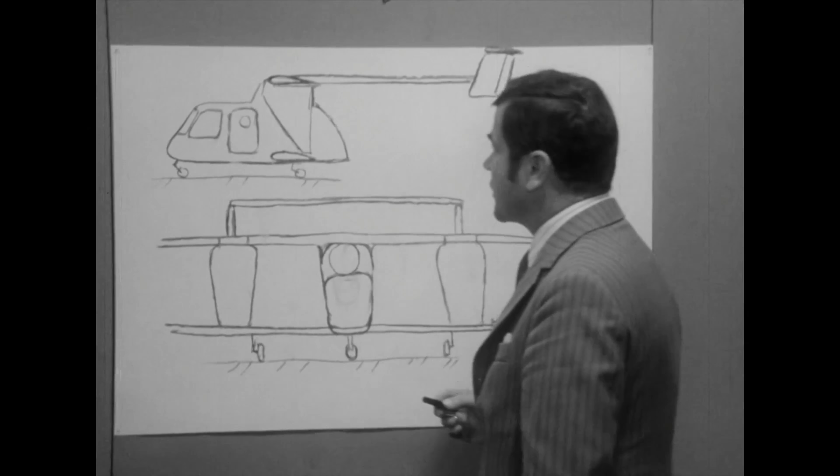Okay, so which country was really behind this jaunty aircraft? Absolutely no prizes for guessing. Well, obviously it was the Soviet Union. 200 engineers were involved in the creation of this aircraft. And with the terrible leadership of two communist countries, we truly have an aircraft designed by committee.

Okay, so I figure I get to do one Soviet anthem drop per subscriber milestone.

Anyway, this story starts, and to be honest kind of ends, with the AN-2. It's difficult to deny that the AN-2 is one of the greatest aircraft of all time. It can be used to transport cargo or passengers, both military and civilian. Variants have been built for water bombing, as seaplanes, for airborne research and ambulances. It can land virtually anywhere. It's easy to fly and has excellent pilot visibility.

And these factors made it uniquely suitable for a different application, crop dusting. A 2-ton hopper can be installed in the fuselage to spray crops with chemicals, and the Soviet Union had plenty of crops to spray. Though large for a crop duster, the comparatively high payload capacity and stability of the AN-2 made it ideal for extended work spraying the expansive farms of Russia.

And interestingly, the majority of them were built in Poland by the state-owned manufacturer WSK Mielec, subsequently PZL Mielec, the heroes of today's video.

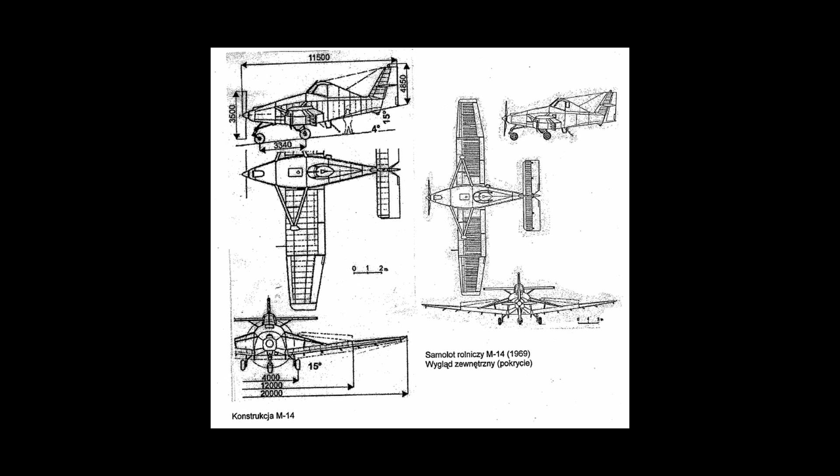The Poles agreed. Mielec had tentatively begun an attempt to rejuvenate the country's aviation industry by commencing work on the M-14. This would replace the crop dusting duties of the AN2. It was to be a huge aircraft for its class with a 20-metre wingspan and powered by a 1,250 horsepower turboprop engine. Those wings would require bracing, and we'll talk more about that later.

But crucially, on paper, there's no reason to assume this wouldn't be a great aircraft for the role. It looks like a crop duster, just a really big one. We're going to gradually find out why crop dusters look that way. But now it's time for the Soviet Union to enter the picture.

And thanks to them, the world was eventually graced with a jet-powered fixed undercarriage biplane crop duster. Now, it would be easy for me to spend the next 40 minutes mocking this, but I'm not going to do that. Well, I'm not going to do that exclusively.

You see, I think there was some method to this madness. Let's not kid ourselves, the M-15 was an absolutely ridiculous aircraft that was ill-suited for, well, anything really. But with some changes, I think there could have been a good aircraft in there somewhere. So let's examine all the major wacky design choices, find out why they ended up in the design requirements, and figure out what on earth the Soviets were thinking.

I think it's best to start with what must have been the worst design choice of all: a jet engine in a crop duster.

There are many reasons this only happened once, and we'll go through those reasons in this chapter. The engine chosen was the AI-25 medium bypass turbofan, prominently used on the Yak-40. By all accounts, a perfectly respectable engine. A derivative of it was even used recently and prominently on the Turkish Bayraktar drones. You'll note a Bayraktar and a Yak-40 are less aerodynamically challenged than an M-15.

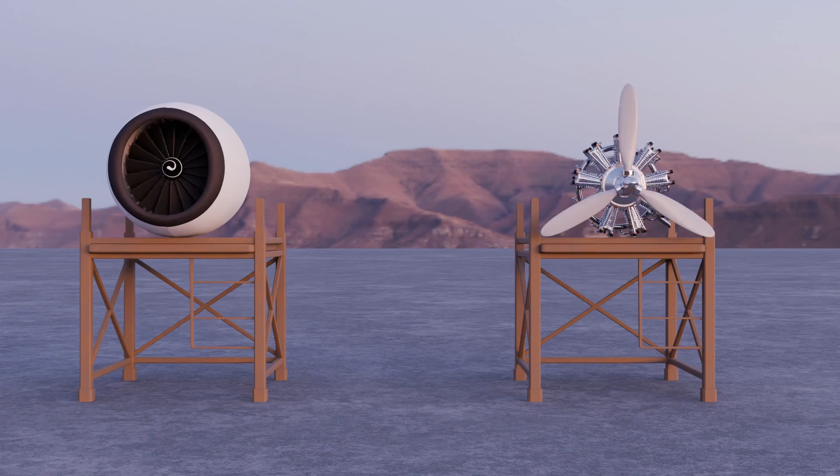So let's talk about fuel efficiency. You've probably heard before, jet engines, specifically turbofans, are extremely efficient, but there are different types of efficiency. Where a typical internal combustion engine will convert something around 25% of the chemical energy in the fuel to motion, a turbofan manages closer to 65%.

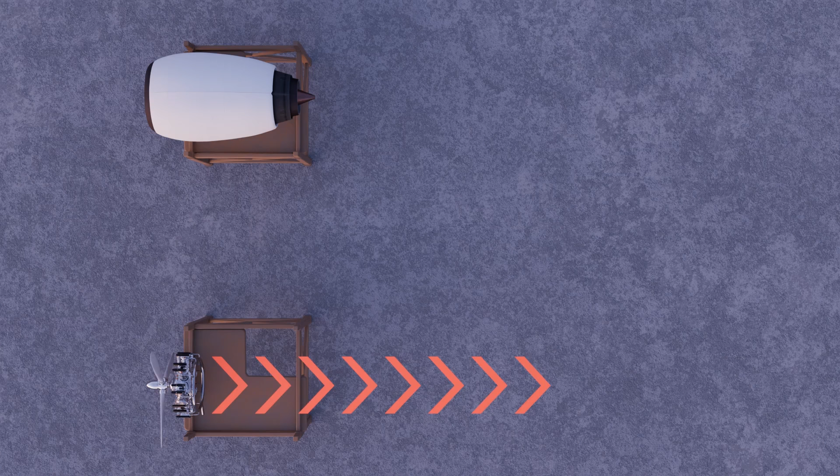Now, a propeller cannot accelerate incoming air to as high a speed as a jet engine can. So for two broadly equivalent engines, the jet is more efficient at accelerating air. But see what I did there? I'm talking about engines just sat on the ground and not moving. All of that newly converted kinetic energy is in the air, which flows at high speed out of the engine exhaust.

So I was talking about the efficiency of just the engine itself. We really only care about how much kinetic energy goes into the vehicle itself. This is what I'm talking about when I refer to fuel efficiency. How much chemical energy in the fuel is eventually converted into kinetic energy of the aircraft. This is also referred to as the propulsive efficiency of the aircraft.

Now, if you try Googling why propellers are more efficient at low speed, you'll get a ton of overly detailed descriptions of bypass air, high combustion temperatures, propeller tip speed limitations, and much more info we do not need. Here's how I've always thought of it: we don't care how the engines work, we just know that a jet accelerates air to a higher speed than a propeller.

So let's put a propeller aircraft on the runway, turn on the brakes, and spin up the engine to full power. All the energy is currently going into that backward airflow and none into the vehicle. The propulsive efficiency is 0. Okay, now let's just take off and get up to cruise speed.

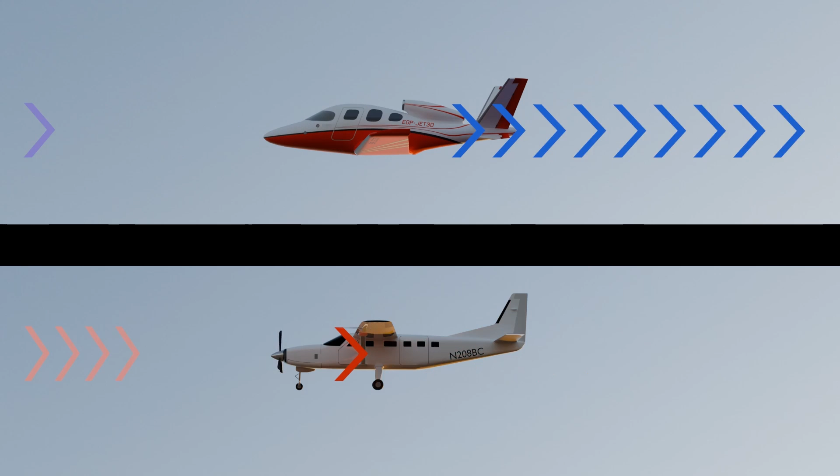Minimizing that air resistance is crucial to ensuring our fuel is used to accelerate the aircraft, not the air. With all that in mind, let's do something ridiculous. Of course, no one would actually build an aircraft like this, but we'll increase the drag as much as possible by making a huge frontal area.

I don't know, let's just replicate the fuselage a couple of times. And let's be really funny by adding a second wing with a huge twin tail. And while we're at it, we'll make the landing gear non-retractable.

Now let's fly this extremely silly aircraft as low to the ground as physically possible, where the air is at its most dense. Our jet engine is only going to be able to get the aircraft up to a relatively slow speed before it can't overcome the air drag.

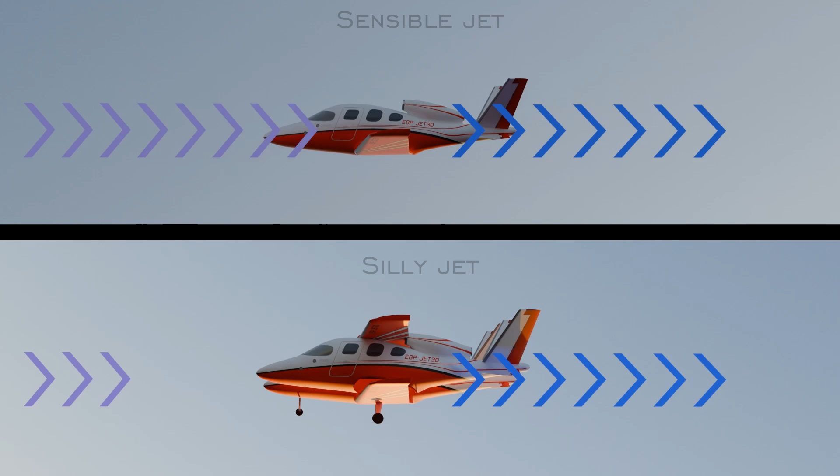The problem is, that exhaust is still moving at the same speed relative to the aircraft that it was before. The end result is us accelerating a lot of air backwards at a high speed, whilst accelerating not very much aircraft forward at a low speed. Most of our fuel is being used to accelerate air, not aircraft.

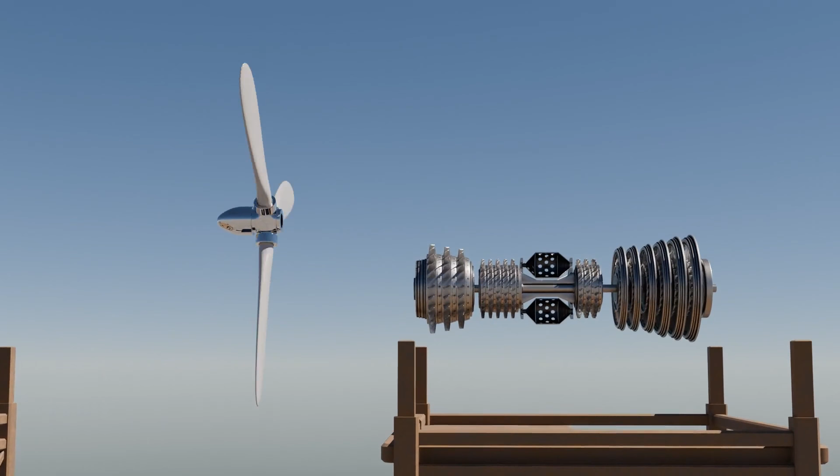Now, maybe we could combine the high combustion efficiency of a gas turbine with the propulsive efficiency of a propeller at low speed by connecting the two via a gearbox. Oh, right, yeah, that's just a turboprop. I wonder how many times I'm going to say they should have just used a turboprop in this video.

The AN2 was not considered particularly fuel efficient at the time. It consumed about 200 litres of fuel per hour. For the M-15, it was 550 litres per hour. Hilarious, considering the AN2 had a higher cruising speed.

Now, there is a theory that because jet fuel was, quote, cheaper than gasoline in the Soviet Union, end quote, that made sense economically. I absolutely do not buy this at all. Jet fuel is certainly cheaper than the more refined avgas used in piston aircraft today, but I think it being less than 35% of the price would be pushing it. And, you know, turboprops ran on jet fuel.

Just use a turboprop. There are a couple of other weak arguments for using a jet engine, and I don't buy those either. One would be the leniency of jet engines when it comes to fuel. That is why jet fuel is less refined than avgas.

The gas turbines on the oil platforms I used to work on could be fueled with practically anything. In an emergency, they could even run on unrefined crude oil, but that was very much not recommended and would require a full strip down if it was actually ever performed. I'm going to go out on a limb here and assume that running an aircraft engine on incorrectly refined fuel is very much frowned upon. So no, I don't think it was intended for Ivan to run his M-15 on vodka from the potato farm.

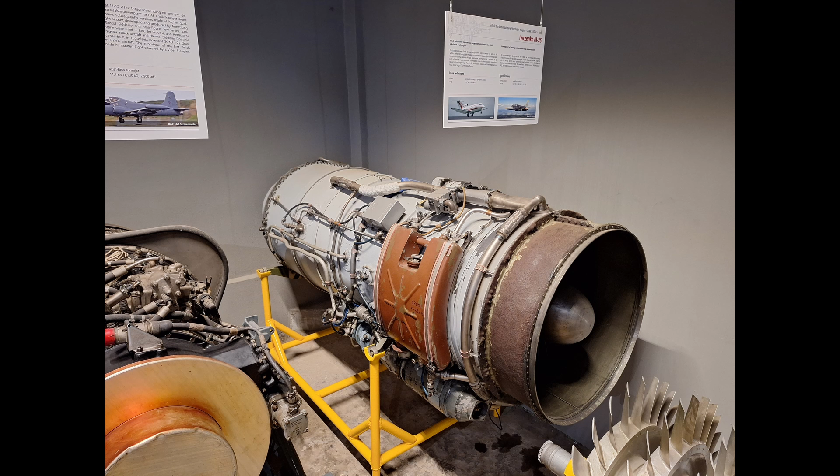Oh, and jet engines are really noisy. That's how the M-15 got its nickname, Belphegor. Though that story is actually quite cool. When exhibited at the Paris Air Show, a journalist used the term in a derogatory manner. Mielec went with it and adopted Belphegor as the unofficial nickname.

You'd think finding another suitable turboprop would be relatively simple. But no, it seems some weird politics happened, and when 1971 rolled around, that was the point the Soviets decided to partner with the Poles. And part of the agreement was the development and production of, quote, new aviation technologies in Poland, end quote.

I've heard it banded around that the Soviets wanted to showcase their tech to the world. Maybe this was part of the reason they insisted on using a jet engine, technology which had already been widespread for 25 years at that point. But either way, I'm pretty sure the actual reason for the choice was just the usual combination of terrible decision-making, corruption, and coercion by higher-ups in two dictatorships.

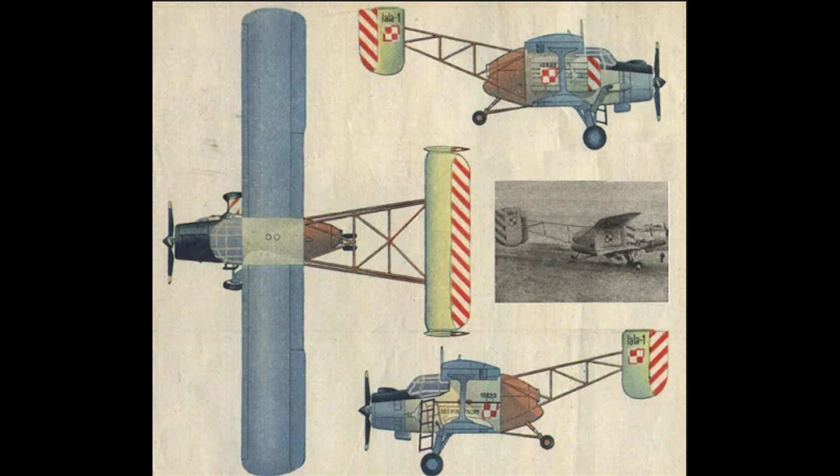There are a few interesting key details. First, the La-La-1 went from initial concept to first flight in just 8 months, and 2 months later, the first flight under jet power was carried out. NASA referred to this as, quote, 'an engineering and organisational success', end quote, and I am certainly not disagreeing with them there.

The AI-25 jet engine requires a smaller starter engine to spin up. Normally this would be part of the ground support equipment. So how was the La-La-1's jet engine started up mid-flight? It technically had 3 engines, because the starter was also mounted internally. When the time came, a dedicated fuel supply was used to turn on the starter engine, which spun up the jet engine, allowing for the forward radial engine to be cut off.

Pilot safety was surprisingly well accounted for, for something so disjointed looking. All 3 engines were isolated in independent fireproof compartments and had their own fire suppression systems. Egress hatches were fitted in the upper canopy in addition to the new doors, which were necessary since pilots could no longer enter from the rear. That's the reason for this ladder as well. In fact, seatbelts were even fitted.

Yeah, I can't decide whether NASA were being sarcastic mentioning that, but they state that the base AN-2 didn't even have seatbelts for the pilot. That can't be true, can it?

So, what did Mielec learn from the La-La-1? Well, it was fitted with a chemical hopper and dispersion system, and they learnt that jet exhaust doesn't really interfere with the chemical dispersal. It would interfere even less if it was mounted high up. This may be the only tangible benefit of using a jet engine in a crop duster, though every other crop duster on Earth that does not have a jet engine seems to manage this just fine.

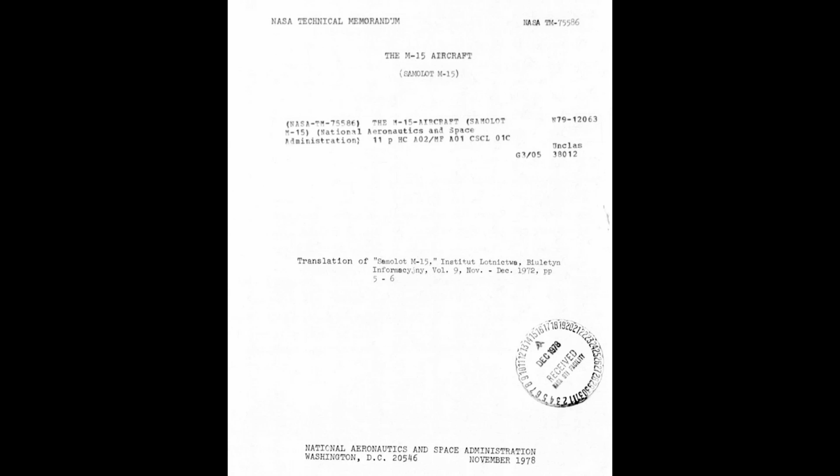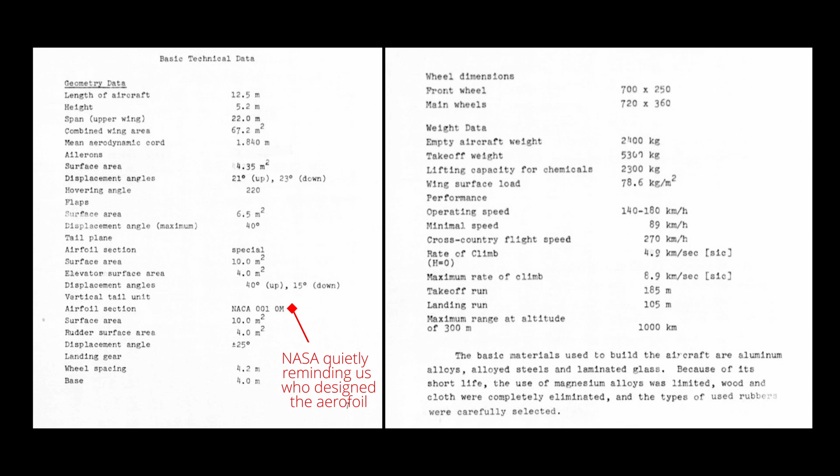Let's see what an engineer working for Mielec at the time had to say about it in this translated paper. Quote, "Using a sesquiplane system permitted rational division of the upper and lower wing." End quote. Indeed, most of the lift came from the upper wing, which was also fitted with the ailerons, flaps and slats, the latter of which were designed to decrease takeoff distance.

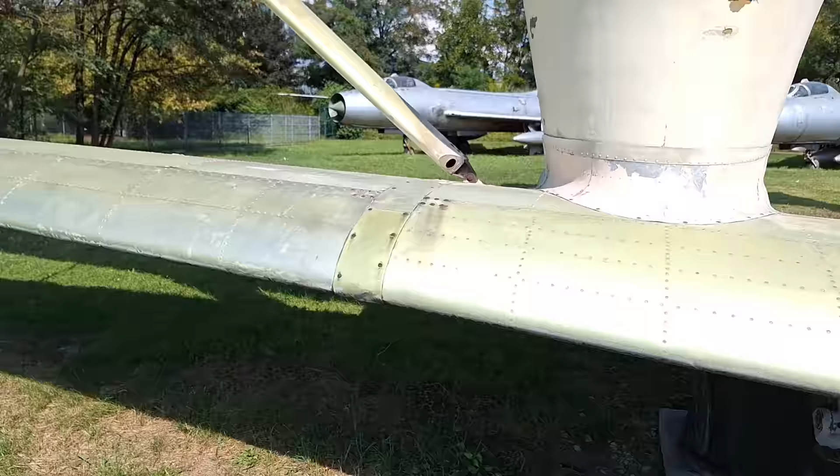The lower wing had integrated pneumatic pipes to deliver compressed air and to distribute the chemicals to the nozzles placed along the trailing edge. So we could say the upper wing was for lift, the lower wing was for crop dusting in a sense.

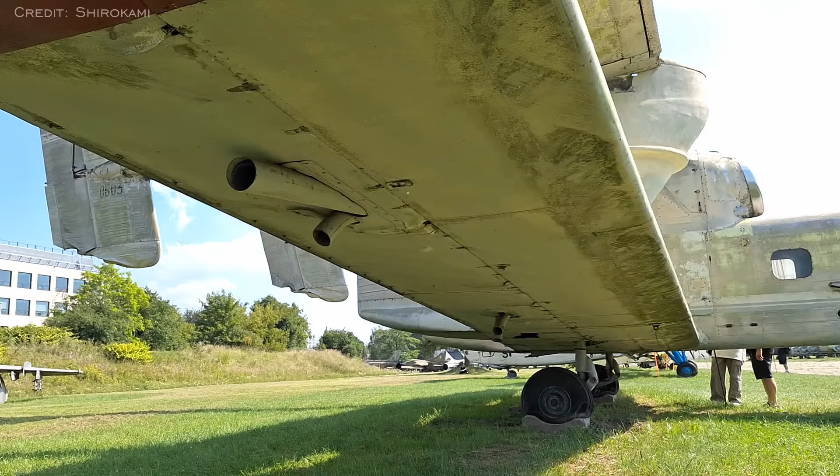One interesting point of note, some articles describe the lower wing as being made of laminate. I can't find any evidence for this from original sources. The paper above states that the primary materials for the M-15 were aluminum, steel and glass. Wood is one of the materials that was completely ruled out. So, if the lower wing was made of a laminate, it wasn't a wood laminate. All that said, the paper does describe the ailerons as laminated, whatever that means. The entire airframe was, however, covered with an enamelled epoxy to protect it from chemical corrosion.

Alright, so I've discussed the positives of going with a biplane for a crop duster. The problem is, another design choice essentially removed the main advantage of a biplane. In fact, I'm honestly not even sure it can be called a biplane anymore based on what I'm about to discuss. So, why were most early aircraft biplanes anyway?

See if you can guess what flavour of engineering my degree is based on how I explain this. Okay, let's take something like that braced high-wing monoplane from earlier. I'm going to do some unspeakable things to it, so, well, brace yourself.

Removing the bracing would put an awful lot of bending load on the wing roots here. Even with the bracing, the bending load is significant. During the early 20th century, the materials were just not there to resist a bending load like that. That is because the materials of choice were basically wood spars and string.

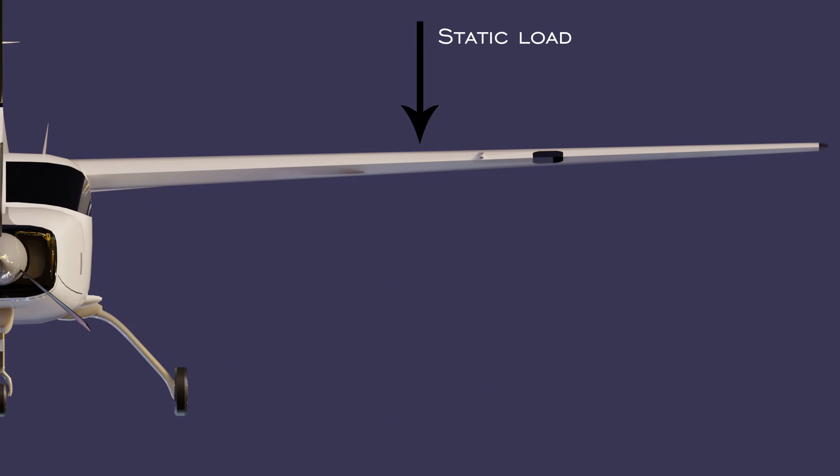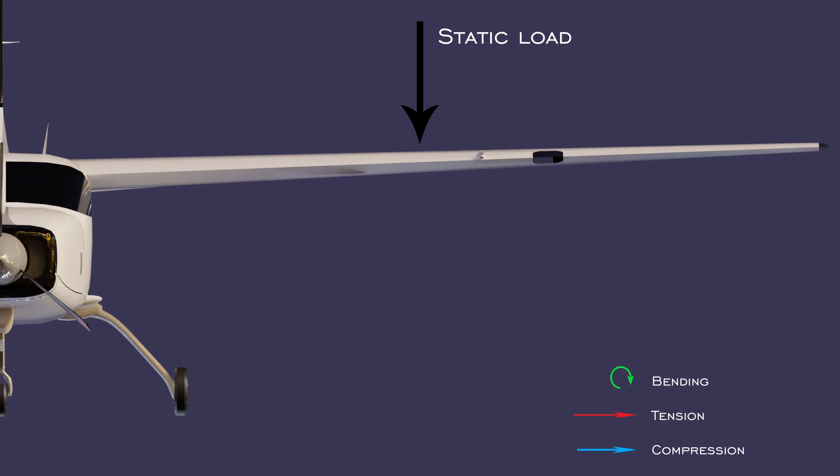When the M-15 was designed, the equivalent materials were aluminum spars and steel cables. Both are excellent in tension, and the spars can also act quite well under compression. So we want to get as much of our wing into tension as possible, followed by compression, and we want to minimise bending loads. Well, here's a way to do it.

Just replace the wing with an I-beam. The horizontal members can both be aerofoils. Now, there may be some problems with that.

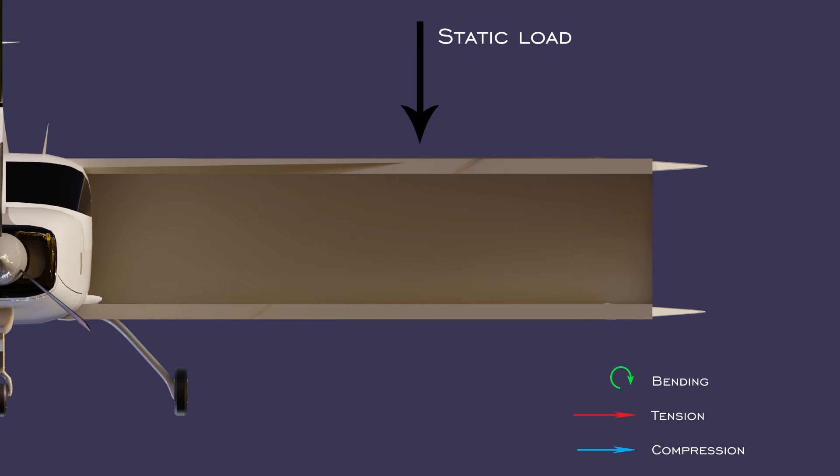Okay, let's cut out some of the I-beam to make it lighter. That intuitively looks like it'll still hold, so let's cut out some more. In fact, let's replace the diagonals with cables, join everything with pin joints, and we've made a cable truss. And yes, my degree is in civil engineering.

I think the only other thing I could have done at this point, more stereotypical, would be to make the thing out of concrete. Honestly, based on what we've discussed so far, I'm surprised the Soviets didn't try that too.

Anyway, here's why this truss works in 2 dimensions only, just to keep things simple.

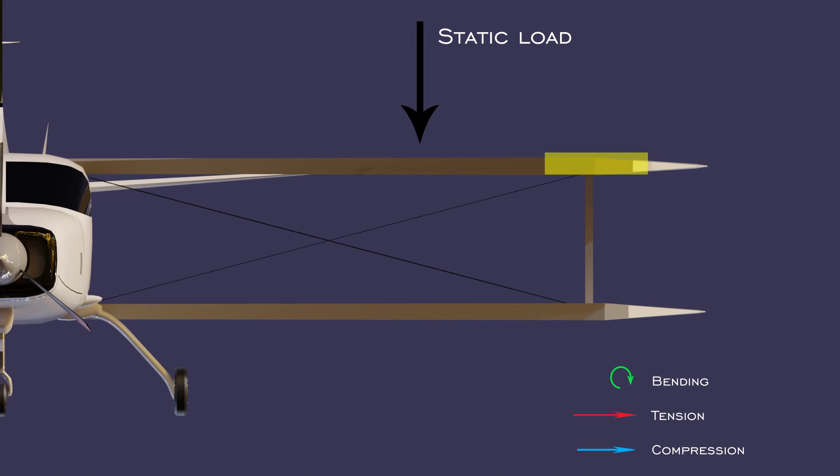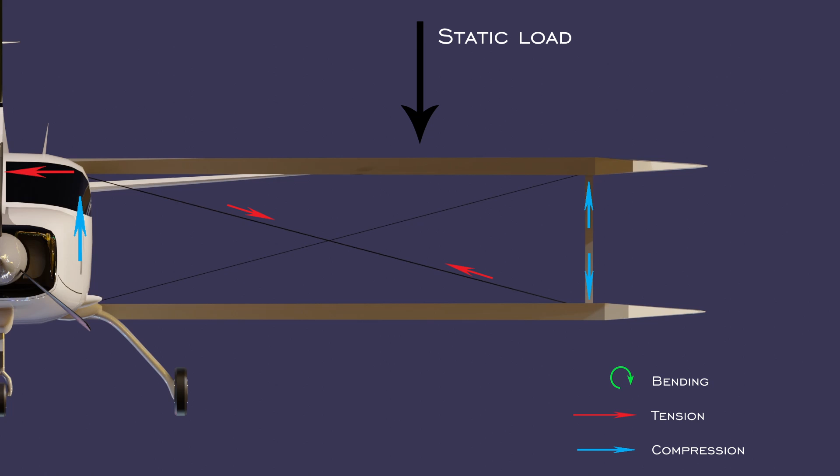Consider this point near the tip of the wing. As the wing tries to flex downwards, it pushes this spar downwards, but this diagonal cable stops the spar from moving by going into tension. That tensile force is transferred into the fuselage as a compressive load in this direction and possibly a tensile load in this direction. Likewise, a lift force on the lower wing puts this member into tension, transferring the load into the fuselage.

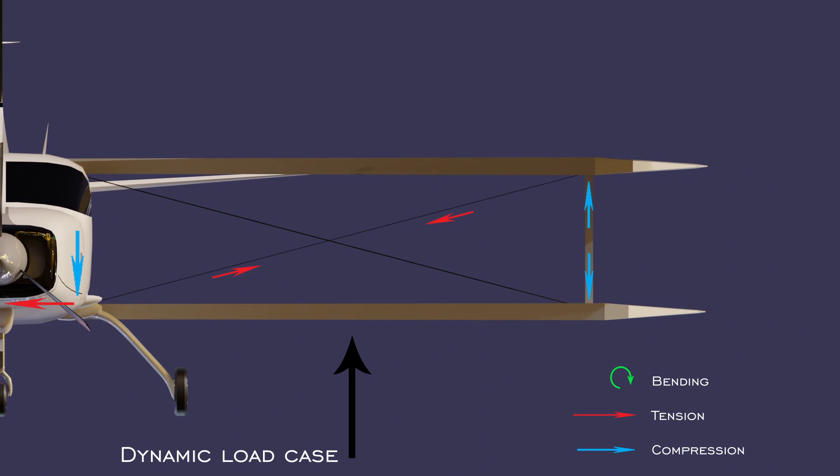So a biplane doesn't require materials with high bending resistance. It has a shorter wingspan than an equivalent monoplane, but the second aerofoil adds additional lift.

Now let's try to decipher what the heck is going on here. Putting the chemical tanks on the wings was certainly a decision that was made, and it completely ruins our biplane model. It ruins a few other aspects too, but we'll get there.

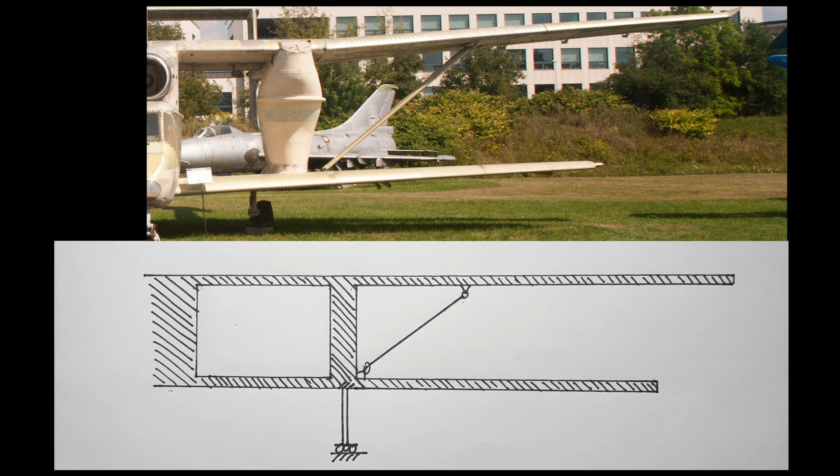Alright, so here's me trying to figure out the load paths. I actually had to rewrite this section twice until I figured out what was happening. I think I was overcomplicating things, and it's probably simpler than I initially assumed. But the crucial detail, I'm pretty sure these tanks were welded to the wings, making the connections fixed. So we can think of this entire box as an extension of the fuselage. It's relatively rigid and contains enough material to resist tensile and compressive loads from the wings.

Okay, let's add in the upper wing. This member is a brace for the upper wing. So far, we can consider this setup as a braced high-wing monoplane. There's still a pretty significant cantilever here, so this portion of the wing over the bracing would have to be built to withstand the associated bending load. The bracing itself carries much of the wing's weight as compression and passes it into the fuselage.

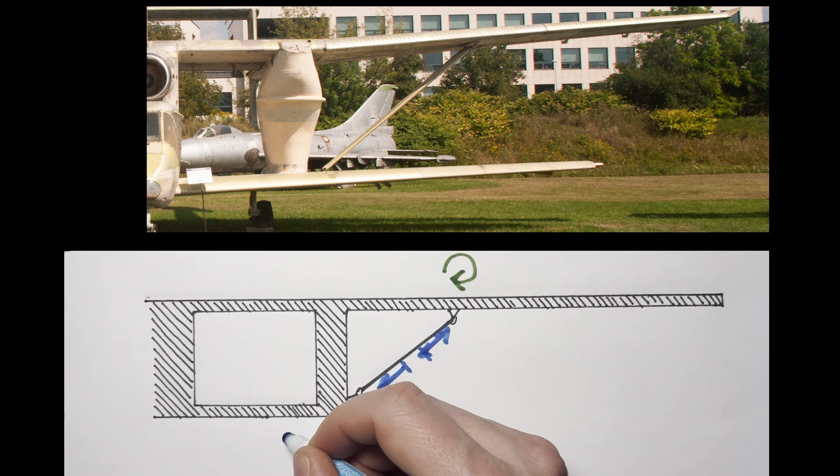Now let's add the lower wing. Outboard of the chemical tank, it's independent of the upper wing, so this length is supported entirely by bending resistance here. As the wings are structurally independent, the main structural advantages of a biplane are lost, as there are no cables and wingtip compression spars to effectively convert the bending loads into axial loads.

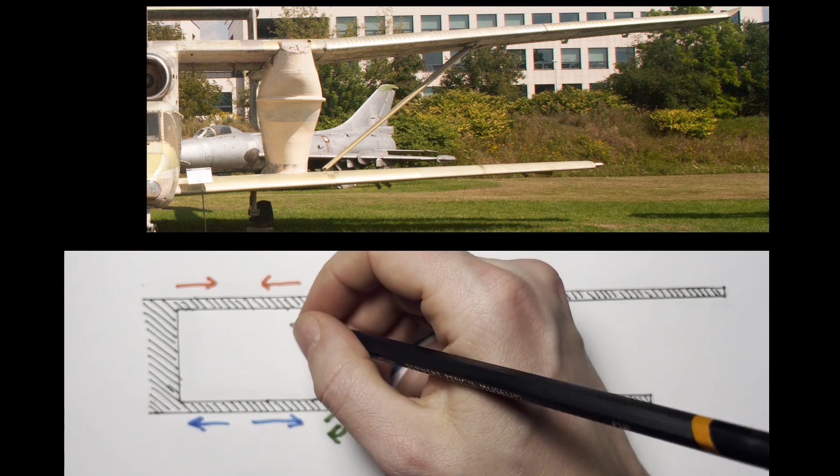Now finally, we need to consider the maximum of 1.5 tons of payload in each chemical tank. This sits above the landing gear, and I'll give credit here, that's kinda clever if we consider it in isolation. When on the ground, the landing gear takes the load in compression, preventing it being applied as bending to the wing roots. In flight, I'm less sure. For calm conditions, the lift would counter the weight of the tanks. But in turbulence, that heavy load on a moment arm from the fuselage may be trickier to model.

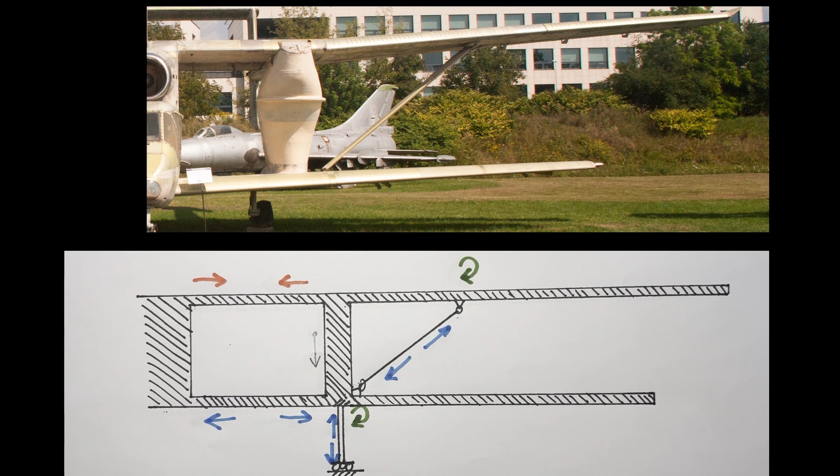The whole thing is a strange hybrid between a braced upper wing and a biplane. I'd summarise it as a widened fuselage braced upper wing with an unbraced lower wing. But it's not quite a torsion box biplane either.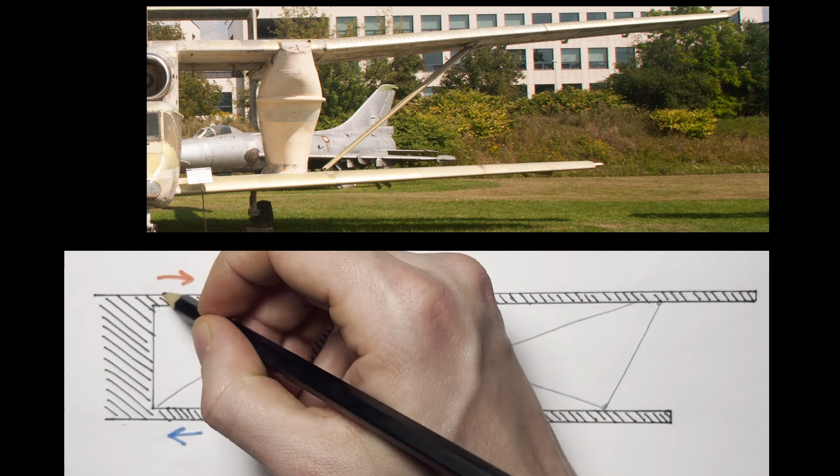So why didn't they do this? I don't really understand. And don't give me extra drag as the answer. This thing already has as much drag as a sail, and the payoff for adding some spars and cables will be less structure in the wing roots, and the wings themselves actually, resulting in a lower angle of attack, offsetting that extra drag. Yeah, it looks ancient, but the Soviets made the biplane bed, so they should have slept in it.

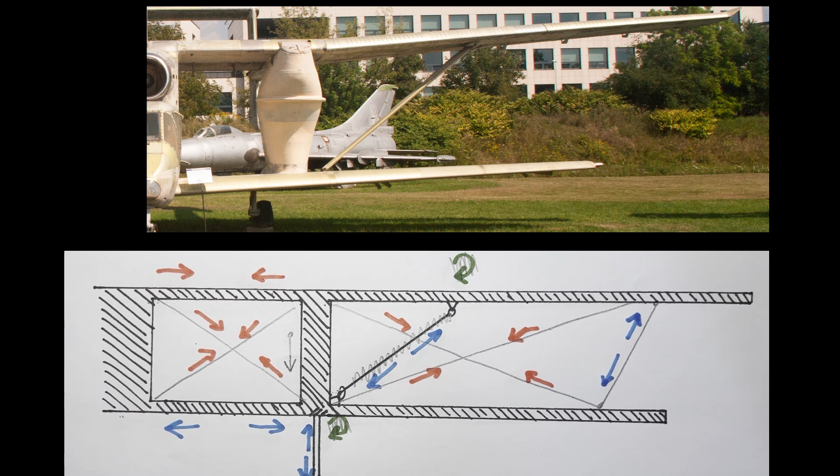Now, I will say, just because I don't fully understand the approach doesn't necessarily make it exclusively bad. But the account written by various contributors years after production ceased does suggest the wing structure was less than optimal. There were no fancy composite materials back then, so all those fixed joints and bending zones needed reinforcing.

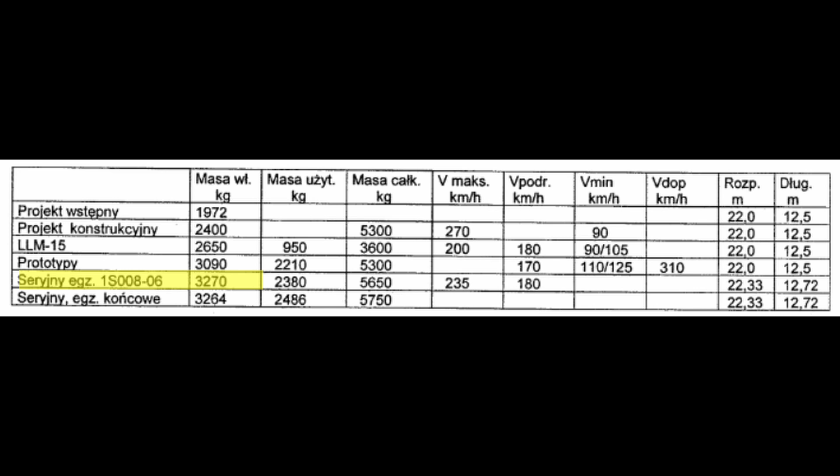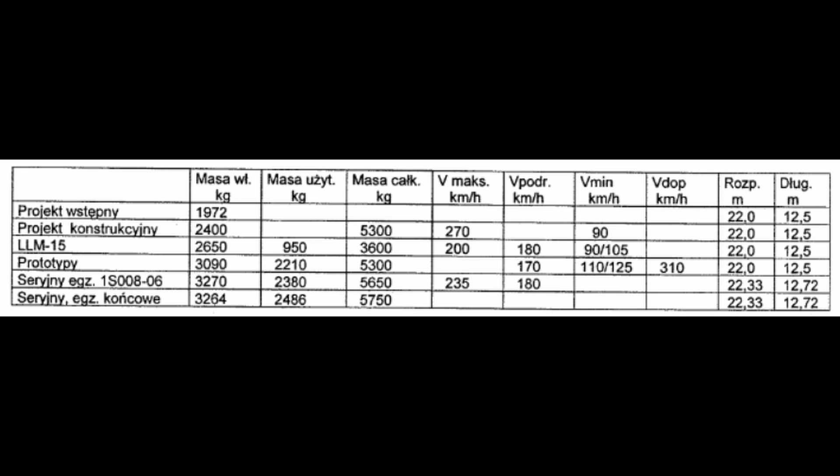The empty mass of an M-15 is sometimes quoted online as being 3,090 kilograms. Problem is, that was for the prototype. Structural testing suggested reinforcement was required, so the production aircraft weighed around 3,270 kilograms. The original design predicted just 2,400 kilograms empty mass. The excess was so severe that the Press Control Office forbade the publication of information about the aircraft's empty weight.

Yeah. But we still have the absolutely glaring issue of the huge increase in drag imposed by putting 2 chemical tanks in the airflow. In fact, it gets even worse, because those tanks were integral to the structure of the wings. Once they were fitted, they had to stay there.

Unlike the AN2 with its removable hopper that could be converted to many other roles, once an M15 was built as a crop duster, it would always be a crop duster. Come hell or high water, I'm pretty convinced those tanks should have been inside the fuselage, as they are on every other crop duster I'm aware of.

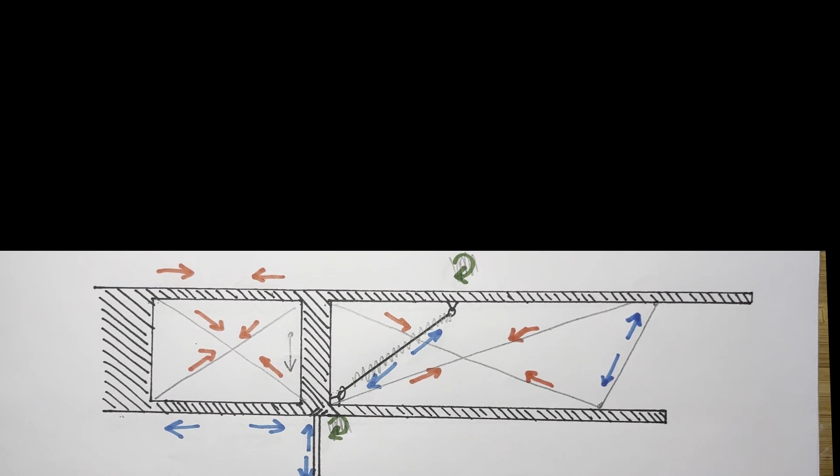That would put a higher bending stress on the wing roots, but I reckon we have a lot to work with here. One choice would be to be normal and make the landing gear like this, reinforced with trusses if necessary. It's fixed after all.

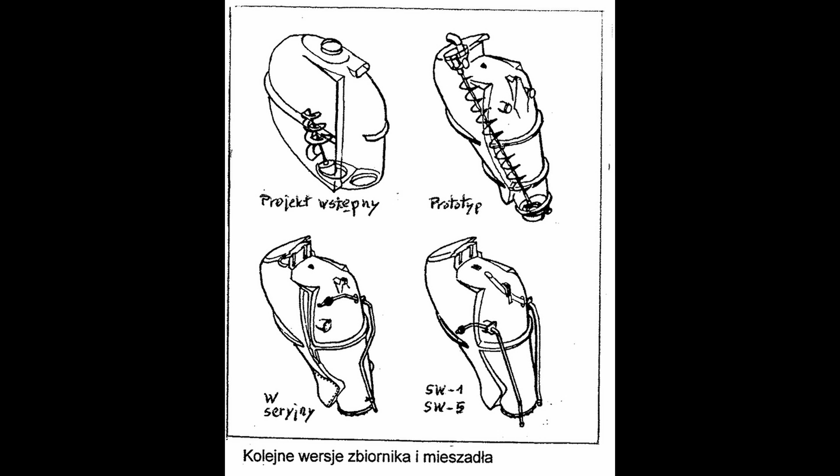with a lower drag penalty than putting the tanks as they were. On the plus side, the chemical tanks incorporated an advanced chemical dispersion system. Pressurized air was fed into the top to allow for effective dispersal of the contents, which could be either powdered or liquid. For powder, an auger could also be fitted, and an emergency dump system was present to allow the tanks to be drained quickly by gravity if necessary.

The compressed air supply was fed from bleed air from the jet engine, perhaps an actual advantage of using a jet. Although, you know what other type of engine can also provide bleed air for energizing pressurized systems? A turboprop.

I have mixed feelings about the fuselage layout for the M15. Some choices appear actually quite smart at first glance, but I think in every case I just find myself asking, why did they do X when they could have done Y?

The overall design is best summarised as a short main fuselage which terminates into a twin tail boom. The main fuselage is a semi-monocoque, also known as a stressed skin design, the standard for all metal aircraft since the 1930s. Remember a couple of years ago when some guy claimed to have invented that himself and was calling it an exoskeleton? Ugh. Anyway, let's start at the front and work backwards.

Well, here it is. The one part of the M15 that I think looks kinda good. If you crop the rest out, I actually think it looks kinda cute. Now, I've already shown in the past I have absolutely zero taste in vehicle aesthetics, so feel free to disagree with me there. More importantly, the setup was quite practical.

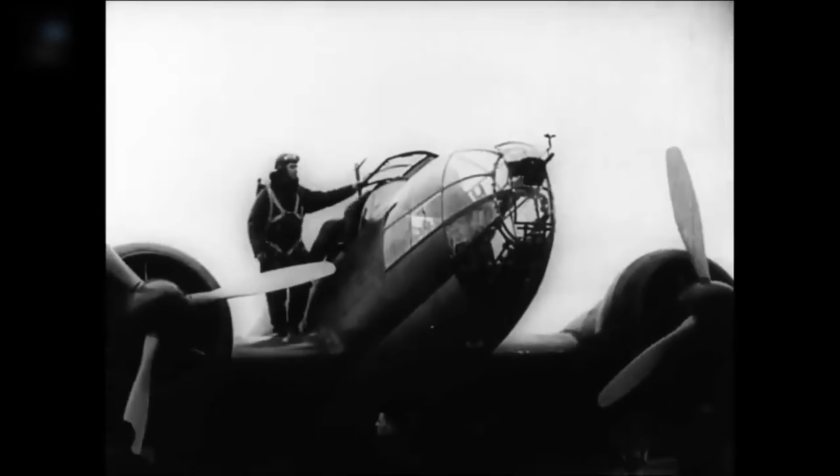The armoured cockpit is a necessity to protect the pilot in the case of relatively common mishaps. Indeed, the M15 cockpit was armoured with laminated glass, but unlike every other crop duster, there was no engine or major structure between the pilot and the ground in the case of an impact. I will say there's potentially a trade-off here. All that forward structure could crush a pilot in the case of a crash, so it's not necessarily exclusively bad. But the pilot in his glazed cockpit in the nose is reminiscent of a bombardier in a World War II bomber. Vulnerable.

Now we move backward to the engine mounting point. This is difficult to evaluate because there's no other single engine jet that's really comparable. Mounting it high would have been pretty much a necessity to prevent debris being ingested during operation on rugged airstrips. Problem is, that engine is mounted really high.

It was definitely above both the centre of pressure and the centre of drag. Normally this is undesirable, as increasing thrust would cause the nose to pitch down, exactly the opposite of what a pilot wants when, for example, making an emergency climb. But the report which I use as my main source for this video contains testimonials from a test pilot.

To be fair, it's just one opinion, but he praises the handling characteristics of the aircraft and makes no mention of this adverse pitch. It's quite possible there was an interconnect between the throttle and the elevators which automatically nullified it, but I can't find any evidence of that. The first landing did look a little bumpy though, so make your own speculations, I guess.

In the testimonial, he also mentions that crop duster pilots will often perform a side slip when coming around for a second pass. That sounds quite dangerous to me, but never mind, it just increases their rate of turn. He mentions that you can't really do that in an M-15 because the aircraft starts vibrating. That sounds rather alarming to me.

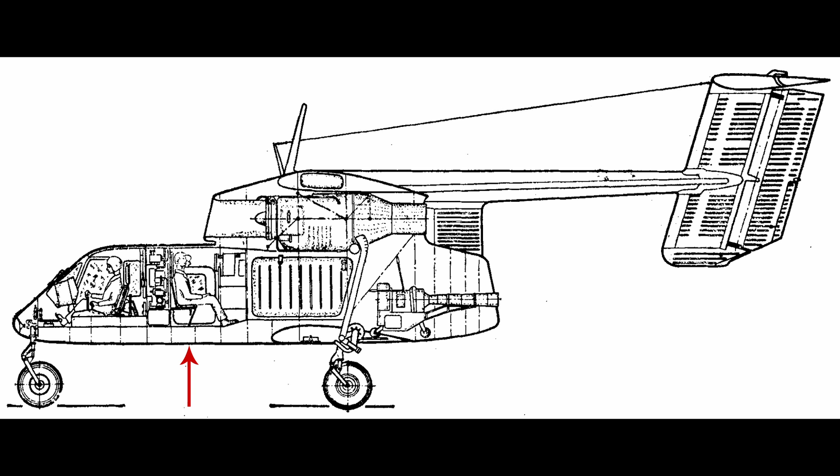Seating was provided for 2 passengers in the rear, again limited by the narrow and short fuselage, which also contained the starter engine for the main jet. That short fuselage became the twin tail boom. This was necessary due to the engine configuration. The high-mounted single engine needed a free path for the exhaust, which passed between the tail booms.

Now, the only other single-engine civilian jet aircraft I'm aware of that went into major production is the Cirrus SF50. And that also has a high-mounted engine, but the thrust is vectored slightly downward to take it through the centre of mass and past the single vertical stabiliser. The twin tail boom is actually a bit reminiscent to me of the de Havilland Vampire. I saw one here right next to this AN2. It's simple and reduces overall mass at the expense of a smaller main fuselage and therefore less room for passengers or cargo. But those 2 vertical stabilisers, they just add even more drag.

At this point, it's probably apt to reveal there was another crop duster with a remarkably similar airframe to that of the M-15. It certainly didn't share everything with it, but it was a biplane, and it had twin tail booms and a short fuselage on top of tricycle undercarriage. And this one was generally considered pretty good at its job.

The Transavia PL-12 Airtruk was built by a comparatively tiny manufacturer in Australia. 138 were built, so it hardly lit the world alight, but unlike the M-15, those that were built generally lived long lives. Some of them are still flying today, so it gets the honour of being referred to in the present tense. It's certainly not in the same class as the M-15, as it can only carry a maximum of 1 ton of payload. Yet, despite only sporting 300 horsepower, it can still carry more passengers than the M-15. I love an ugly duckling, and I love the Air Truck. Although it's half the size of the M-15, it's twice the aircraft the M-15 ever was.

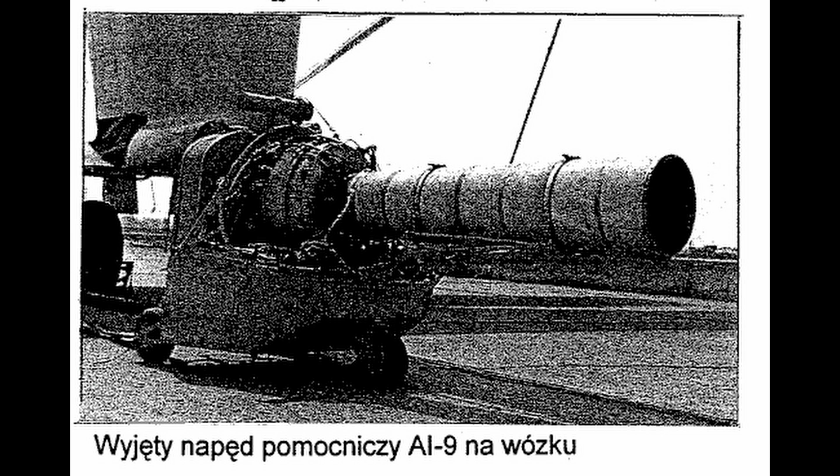A recurring issue with the big heavy biplane was the distance needed for takeoff and landing. So one of the prototypes was fitted with an ejector - not an ejector seat, a jet exhaust ejector. This is an optimised exhaust designed to increase thrust. And for landing, it was fitted with thrust reversers. These additions were never carried forward into the production version. Again, I do feel that once you're fitting thrust reversers onto your crop duster, it's probably time to take a step backward and ask yourself what you're trying to achieve.

This is the polar opposite of helicopters like the Mi-2 and the Ka-26, which were actively converted into crop dusters and performed the job with great success. That's despite the higher running costs. The ease of landing and increased mobility made these an economical option.

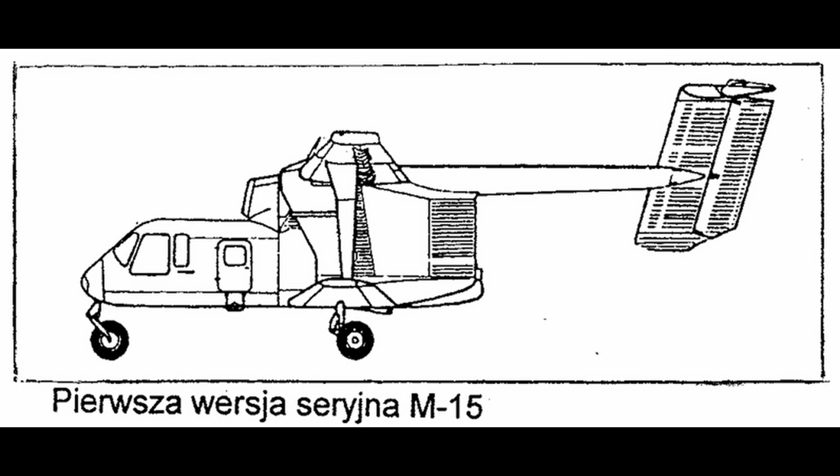The variant of the M-15 I've shown through most of this video was the first variant, the one with the nice looking cockpit. But the second series removed even that with a more conventional nose. That nose is just screaming for a turboprop to be added to it.

There used to be one mounted next to a highway in Hungary, but it seems that was removed recently, which is a shame.

The first variant that wasn't actually built but came alarmingly close to it was the water bomber variant. This would have been capable of delivering 2,200 kilograms of water or firefighting chemicals to a target. Would this have been sensible? I don't really know. I just imagine one of the tanks jettisoning and the other jamming shut, which would be not ideal.

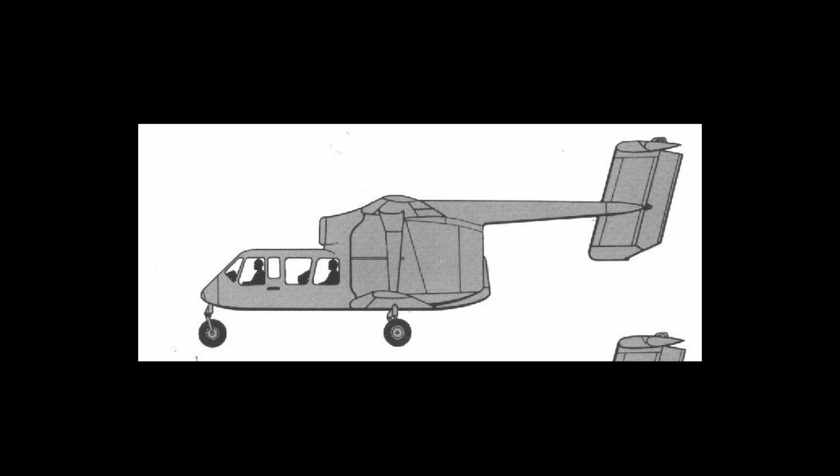All built models had seating for 2 occupants in the rear, allowing the M-15 to ferry personnel between locations. The proposed passenger variant would add proper windows and more comfortable seating. For what it's worth, given what we have to work with here, that doesn't seem like a terrible idea. It may have been possible for pilots to make some additional revenue ferrying passengers between destinations.

But why stop in temperate Russia? Why not take this thing to Siberia? I can think of absolutely no reason to do so, but if you wanted to, Mielec proposed the ski version, and then apparently refused to elaborate further. All I have is this low-res drawing of what could have been.

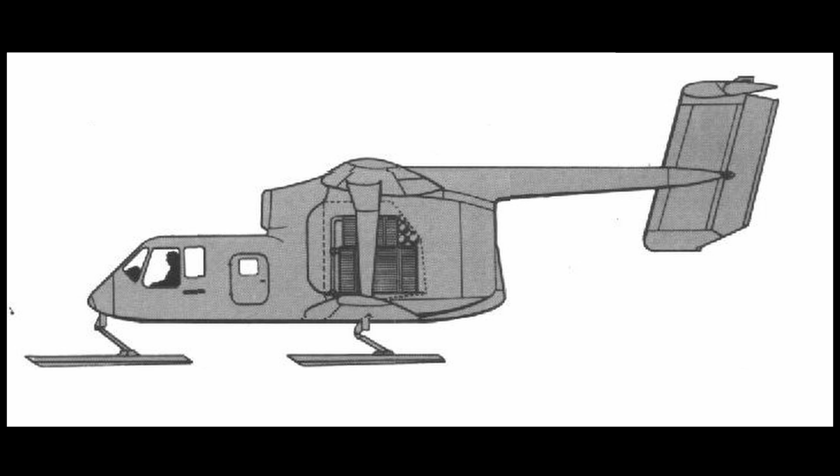Now, you may be thinking, yeah, that's cool, but can we increase the drag even more? How about a float plane version? I'm not sure if the firefighting version was proposed as a float plane. Either way, you would have to convince me hard that this thing could even get off the surface of the water. But the most cursed variant of all, the passenger gondola version.

Why not showcase your aviation expertise to the world by designing something that looks like it was designed by a crazy Italian genius in the 1920s? Yes, the passenger version would have replaced those chemical hoppers with 2 passenger cabins. Hell, Mielec even proposed putting a cargo version of that on skis.

Many lament the fact that the Soviets only flew Buran once. I'm more sad that we never got to see this piece of childhood artwork fly.

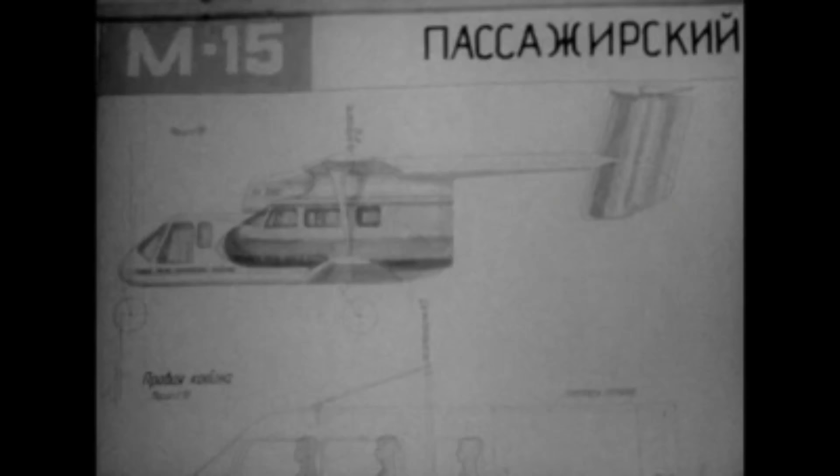Whoa, we're not done here yet. So I found this tiny clip in some Polish archive film showing some more detail of the passenger gondolas. Looks like each one was intended to carry 5 passengers. And it seems the Soviets took the idea home with them.

And finally, just to dispel a myth, the M-15 wasn't secretly built to drop chemical weapons. Why would it be? It'd do an absolutely terrible job at it.

As you will have probably guessed, there isn't really much information readily available on how well the few M-15s that were produced actually performed their job. The test pilot account in the main source for this video speaks very highly of the handling. He mentions an exceptionally tight turning circle on the ground and easy and stable flight characteristics.

To be honest, I don't really trust this account. For example, he dismisses shortcomings as, quote, peculiarities, which were not shortcomings for Russia at all, end quote. These shortcomings included a high minimum speed for crop dusting of 110 km an hour, but that was just 20 km an hour below the max permissible speed. And he mentions the long takeoff length, which is really difficult to just dismiss as a peculiarity for a crop duster.

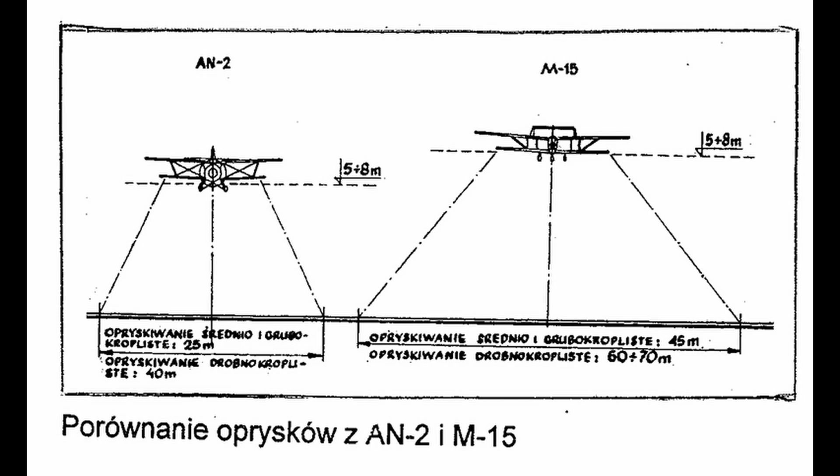Now, let's be fair here. The M-15 did perform well as a crop duster in agricultural trials. And these weren't just made-up Soviet trials. One was assessed in East Germany, at the Chemical Agro Centre in Damgarten. It could spray chemicals over almost twice as wide a strip of land with each pass and could apparently work at twice the rate of an AN-2.

In a vacuum, the M-15 was probably a pretty great crop duster, but it didn't operate in a vacuum. It operated in the Soviet Union. The failure of the aircraft to become widely adopted is, in this report, attributed almost exclusively to external factors. The first of which was absolutely abysmal ground support.

Remember, at this point the Soviet Union was falling apart. For instance, chemicals were frequently stored in heaps outdoors where they'd clump together and block the chemical system on the aircraft if not crushed with a tractor first. Of course, I find it difficult to believe that the design of the M-15 wasn't the real reason for its failure. Though one external factor that definitely did curtail production was the global economy. With lower refining costs, jet fuel is more sensitive to crude oil prices than avgas or even gasoline.

Now imagine if the oil price tripled overnight, because that is what happened in 1973, and it never really came down again. The refining and transport costs for fuel were basically fixed, so the margin between jet fuel and avgas was reduced. Suddenly, an aircraft which consumed triple the fuel of its piston engine equivalent didn't look so attractive.

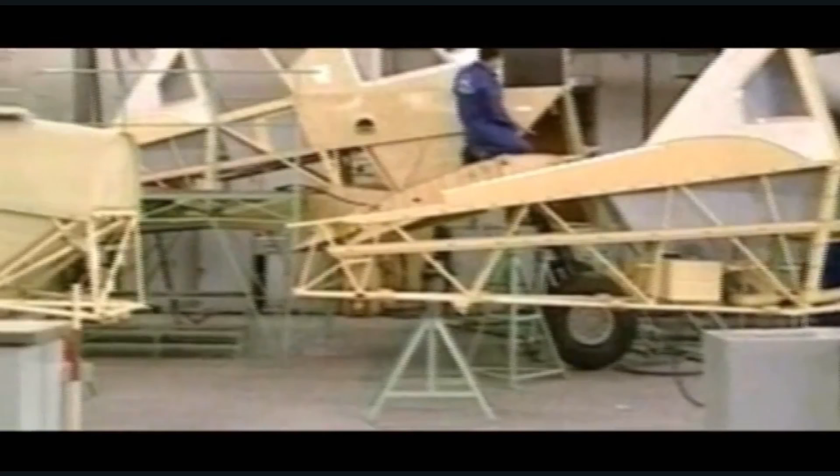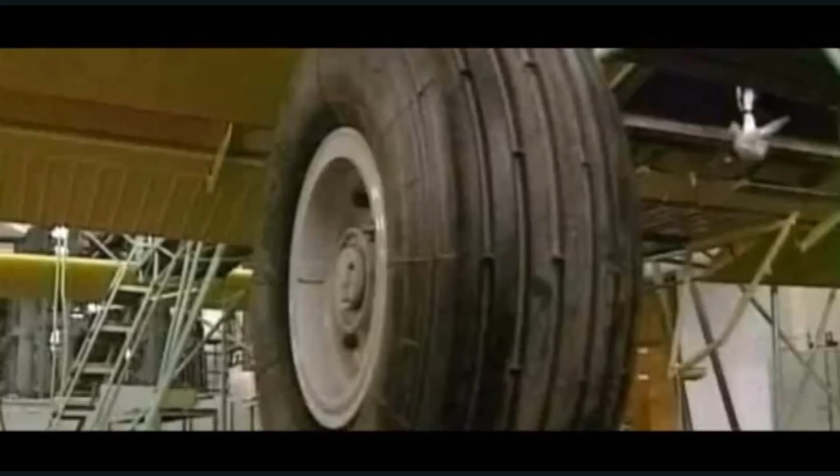By the late 1970s, that's what the engineers at Mielec did, as part of another partnership, but this time not with the Soviets - it was with the Americans. 20 years prior, an American engineer, Leland Snow, had designed one of the most successful crop dusters of all time, the Thrush. His company was subsequently bought up by Rockwell, who were interested in upgrading the Thrush with the Polish-built PZL-3 radial engine, itself a variant of the Soviet AI-26.

For their part, the Poles took some of the best aspects of the Thrush and increased the payload through various modifications. The result was the M-18 Dromedar, one of the most successful Polish aircraft in history. Many of them are still in active use. Dromedar - dromedary camel - that's what it's named after, because it looks a bit like a camel.

Though it's not the giant crop duster the Soviets initially envisioned, it does exactly what it was designed to do. But let's go back to that proposal for a giant crop duster with a 20-metre wingspan and a turboprop engine that kicked off this saga in the first place. It turns out it was built in the end.

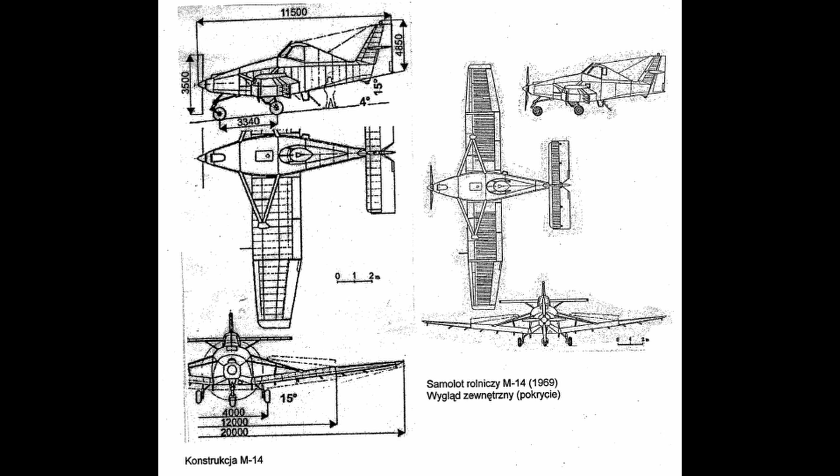Just it wasn't built in Poland - it was built in the US. Snow quit Rockwell in the late 1970s to establish his own company, Air Tractor. They initially built reasonably conventional agricultural aircraft with radial engines, but by the 1980s, they started experimenting with turboprops.

In 1990, the Air Tractor 802 first flew, with a wingspan just shy of 20 metres and a payload capacity of 4,000 kilograms. It's by most definitions the largest single-engine turboprop flying today, and it almost certainly either meets or exceeds all the original specifications Mielec set out when they began work on the M-14. It even approaches the legendary versatility of the AN-2.

It's used as a water bomber, and there's a military variant, the Skywarden, which exploits the high power and armoured cockpit. The Air Tractor is the quintessential rugged agricultural aircraft today. Poland were extremely close to building it themselves back in the early 1970s, but unfortunately the Soviets got involved and we got the M-15 instead.

Maybe they should have just used a turboprop.